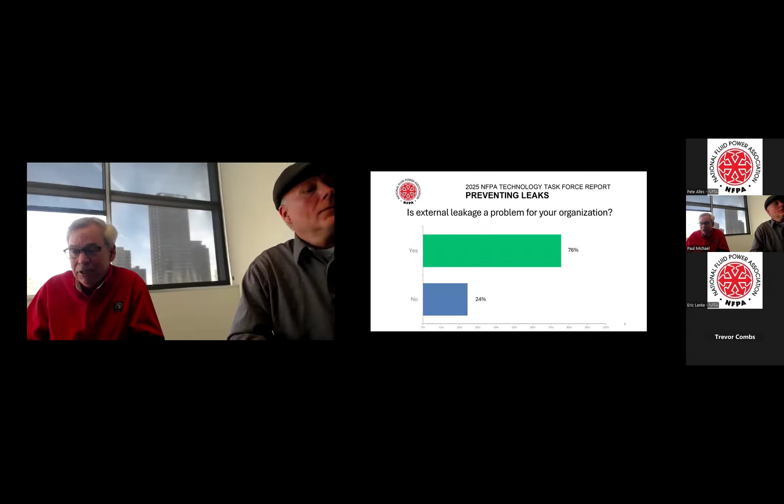So we're getting into the document, the white paper, and this will be posted on the website in a couple of days along with the recording of our presentation. It starts off by talking about application factors—component accessibility, temperatures, compatibility, things like that. I've enjoyed going over these considerations with Andy, and he had something really interesting to say about how fluid contamination causes leakage.

Fluid contamination causes a circle in the system: when you have contamination, you get wear on components, seal wear, leakage, increased temperatures, and then the circle gets bigger and bigger, causing more and more leaks. So by correcting contamination, you stop causing component wear, which stops causing heat, which stops causing other issues—hardening of the seals could be one, or hoses, or expanding and contracting of fittings beyond what they're normally designed to operate at. Good insight.

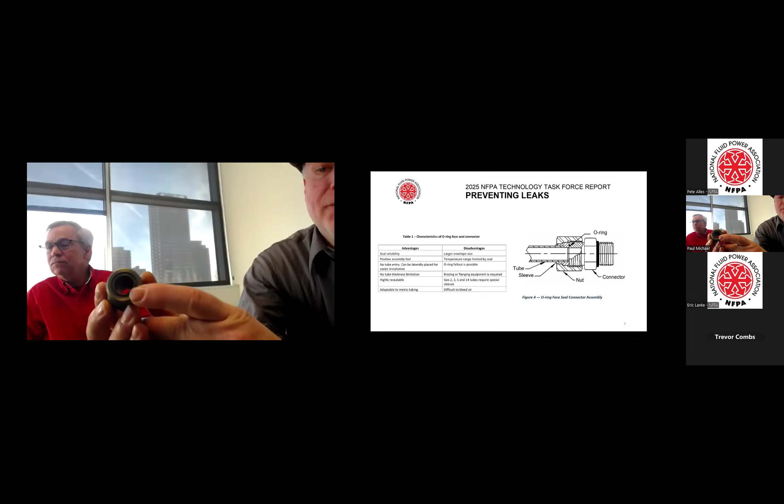So the O-ring face seal actually has a positive seal in the face of the fitting. Therefore, when the face hits, it has a positive seal when you tighten it correctly.

Most of the other fitting types, like the JIC, here is a compression metal to metal seal. Also with the bite type, which has to seal on the ID and the OD.

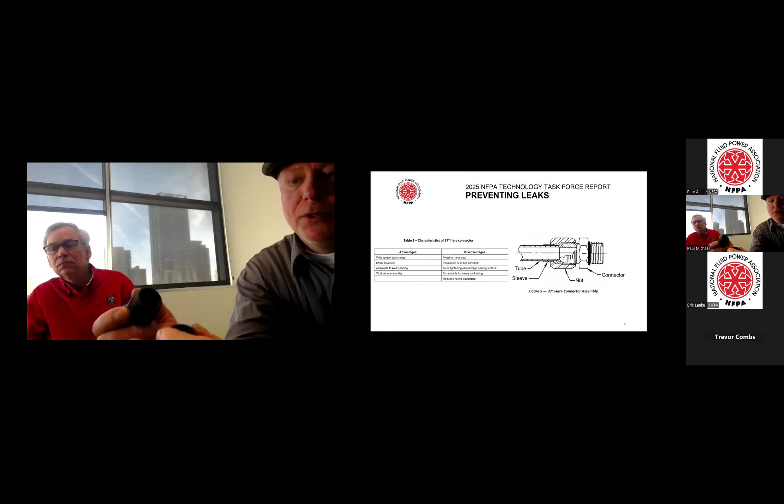All these fittings take a certain amount of skill to put together, which the O-ring seems to be the best for most applications just because it does have a positive sealing surface, which does not have to require a metal-to-metal fit. Because when you deal with a metal-to-metal fit, we did this in our shop and purposely over-tightened this fitting to cause damage to the seat. So even if you replace the hose on this fitting, you're still going to have a damaged seat, which then will cause leakage.

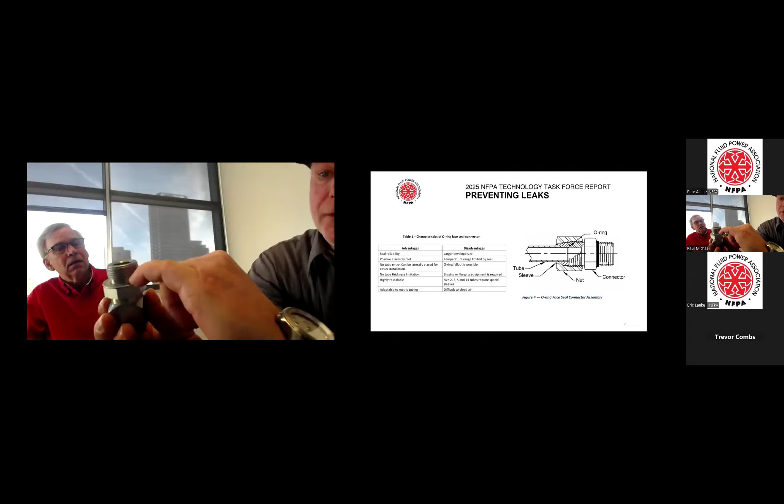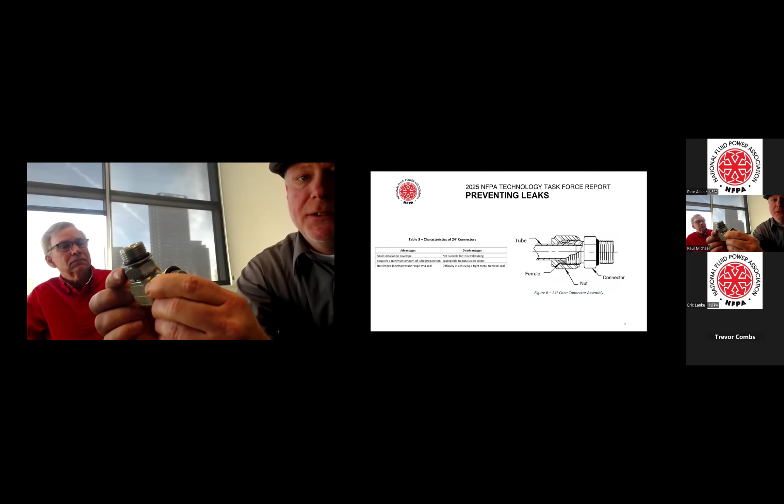So there's various types of other things with the SAE adjustable fittings. This is the O-ring groove where it sits. Numerous times these are installed improperly, and what happens when you install them improperly is you drive that O-ring down into the thread and then you get seepage over time. The correct way to do it is to back up the nut, let the washer come up to there, hand tighten it till you seat the O-ring, and then you have a 360-degree turn before you tighten your jam nut.

That way that O-ring does not jam into that first thread. So a lot of this takes some skill. The O-ring face seal takes the least amount of skill. The others all require some skill set. So it's a positive seal.

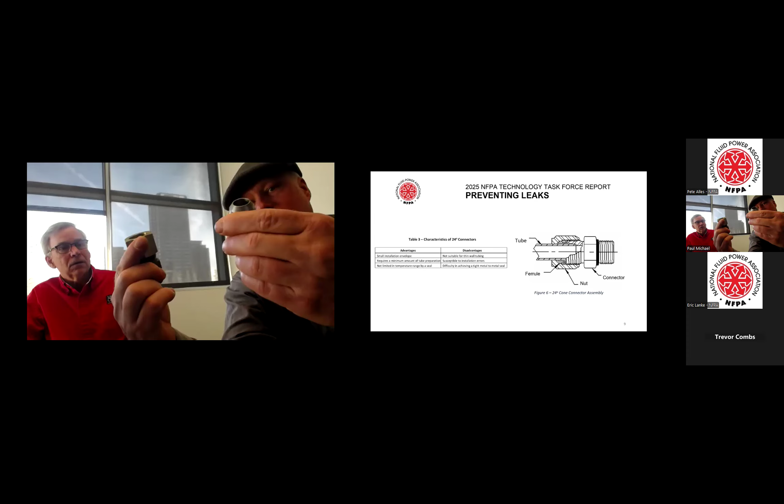So therefore, it's the superior fitting as of right now. The problem with it is you do have a little bulkier of a connection, right? The nuts are bigger, the physical size is bigger - this is a 12 JIC, this is a 12 ORFS. So you physically have size difference. There is a little bit of extra cost to that fitting also across the board, depending on how you look at it, but it does prevent more leaks. The downfall, again, is O-ring material and compatibility, making sure that fits for your application.

Very good. Thank you. We'll look for questions in the chat.

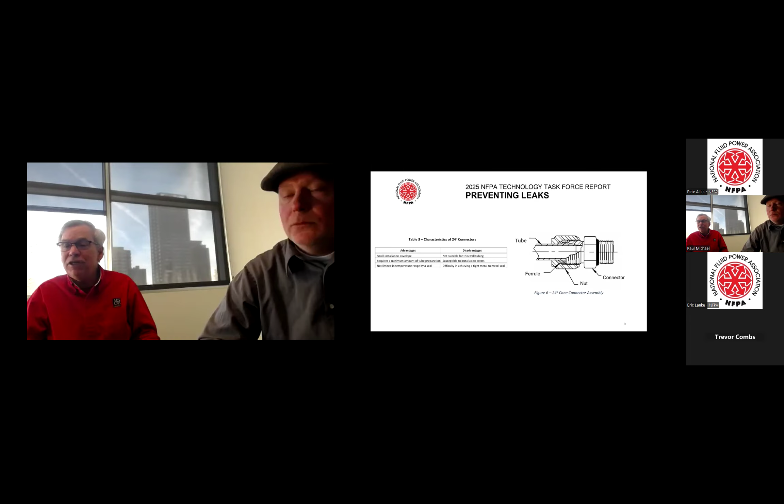So that covers the O-ring face seal and 37 degree. Tell me about the 24 degree one.

The compression fitting is made up of the body and the sleeve, which the tube has to be inserted all the way down to the bottom. They do make a tool to preset this to the tube, but most people, if they're doing a field repair, they'll push the tube all the way down. You have to hold the tube all the way down and then tighten this to get it to crimp to the ID and to the OD into the seat.

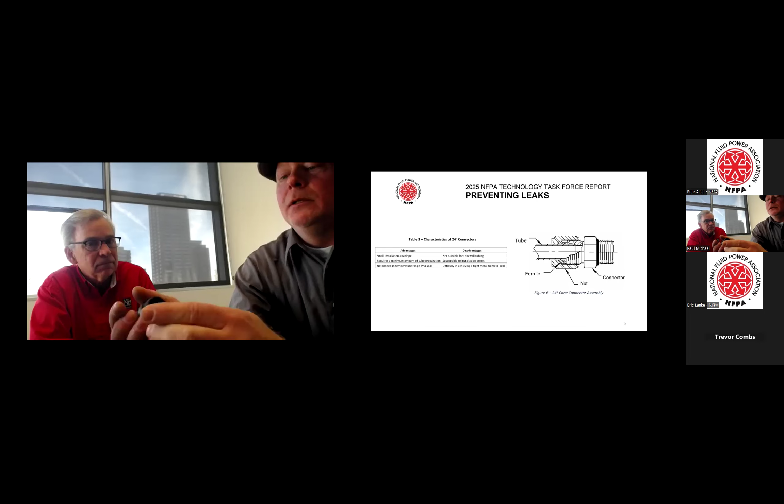The issue with that is you can over tighten that fitting and cause an internal crack on the tube because this is biting into the tube and deforming it. And manufacturers vary on their design of that fitting.

So it's more so that you can't interchange. JIC is JIC - pretty much across the board, they're going to work. Where a bite type, manufacturers make them differently, so they're a little unique to themselves. If you go with one, doesn't mean you can directly take that off and put another one's on.

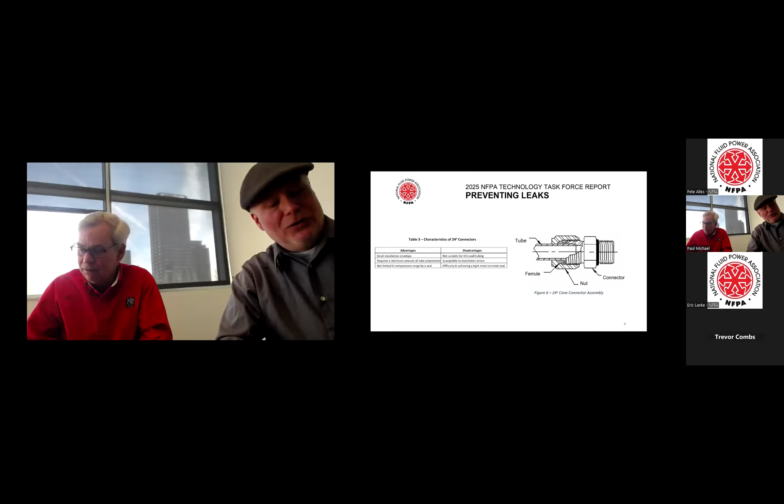37 degree is JIC. Just to make sure you know there's some variance in our industry—O-ring face seal, ORFS. There is some different terminology across the manufacturers that is not unified for identifying all the fittings, so there's some variance in the language. Like this particular fitting takes a Boss O-ring, which I forgot to bring up. So there's some variance, yes, in the industry.

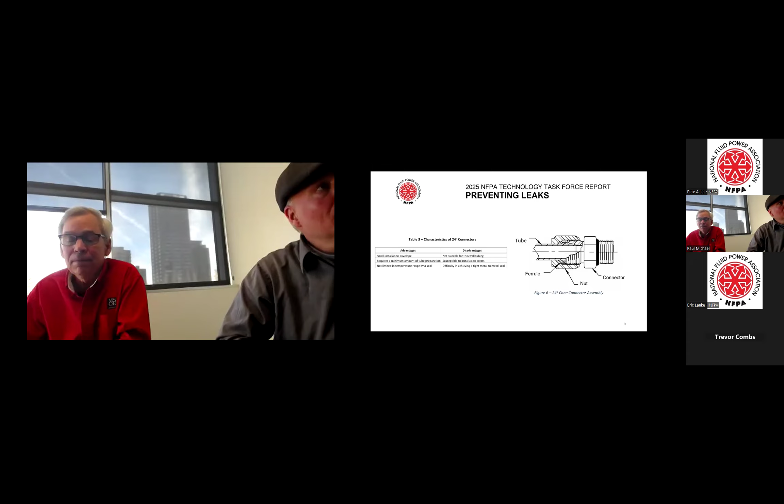What are your opinions on securing style O-ring, with assembly issues like normal O-rings falling out or getting pinched? There are various types of O-rings that have come out. There are particular OEM manufacturers that make their own O-rings for some fittings. I've used quite a bit of them—some work very well. There is a downside in cost, so there's pros and cons. It does work in most cases, but it has to be applied correctly, and if cost is an issue, that's probably not how the average OEM would build it. This is for people worried that during the assembly process with an O-ring face seal, the O-ring's going to fall out.

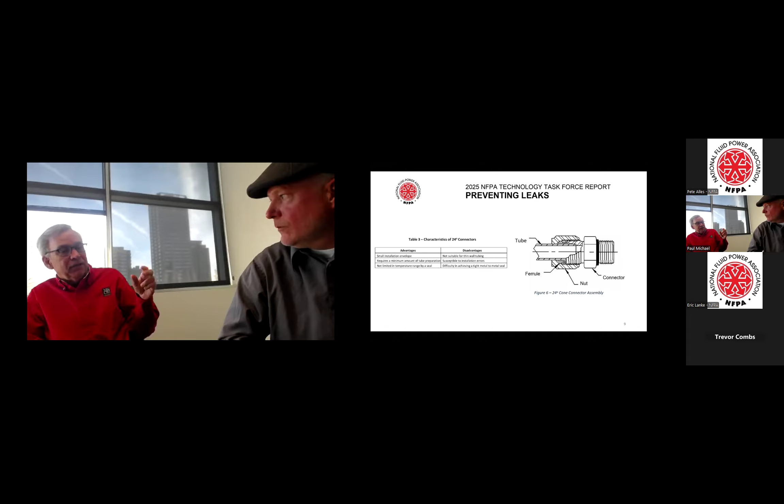There's a lot of different seals you can put on that face, and it would take me a long time to go through all of them. We'll talk about that in a little bit though—there's a lot.

What are your thoughts on the O-ring in the JIC male fitting? It's also noted that JIC stands for Joint Industry Council. Are they talking about the O-ring directly on the face? It doesn't say—so, your thoughts on the O-ring in the JIC male fitting. It's been my experience that they work well.

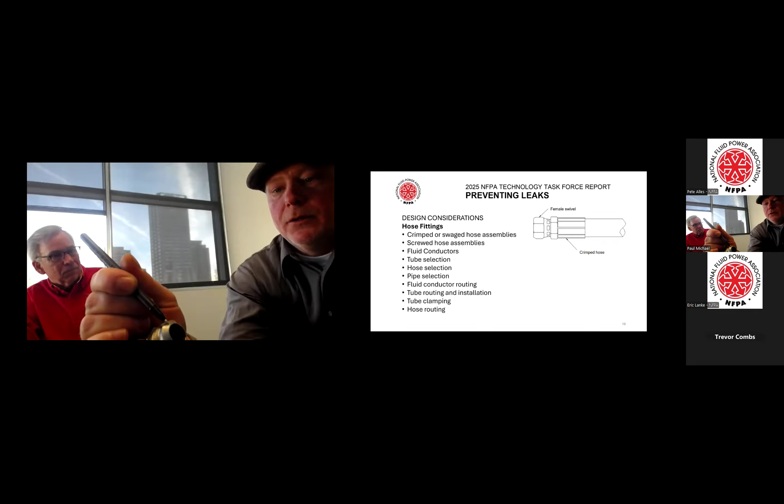The issue is they're more susceptible to collapsing the ID of the actual fitting. Some manufacturers put an O-ring right on the seating surface, and they work well. The issue is a lot of mechanics over-tighten it and start collapsing the ID, which if you maintain the proper torque specifications, they do work and work well. But again, mechanical aptitude versus functionality is sometimes a hard blend to get right.

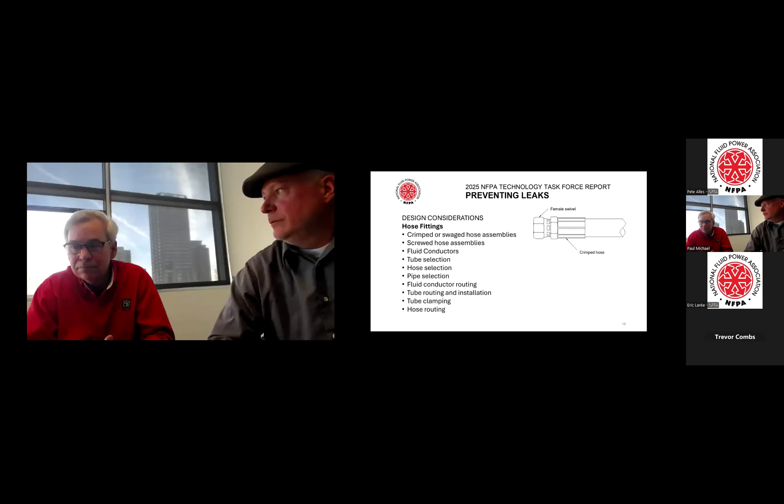Great comment in the chat suggesting you join the ISO TC 131 SC7 Work Group 3, working on a technical report on usage, design, storage, assembly, material, etc. So yes, joint standards—you can contact Ben Brown at NFPA to get involved in the standards development committees.

In the document, we have quite a bit dealing with hose fittings—selection, routing, clamping. We're really excited because Chad Chapman from Gates is going to be presenting on hoses next, so we're looking forward to his presentation on the topic. But there's a lot of that in the white paper as well.

Next, in the white paper, we get into the assembly practices, and one of them is the split flange port. Andy and I were talking about how you do this 4-bolt tightening pattern when you've got a heavy hose with a flange on the end, trying to get it bent into position and stay there while going from one half to the other half.

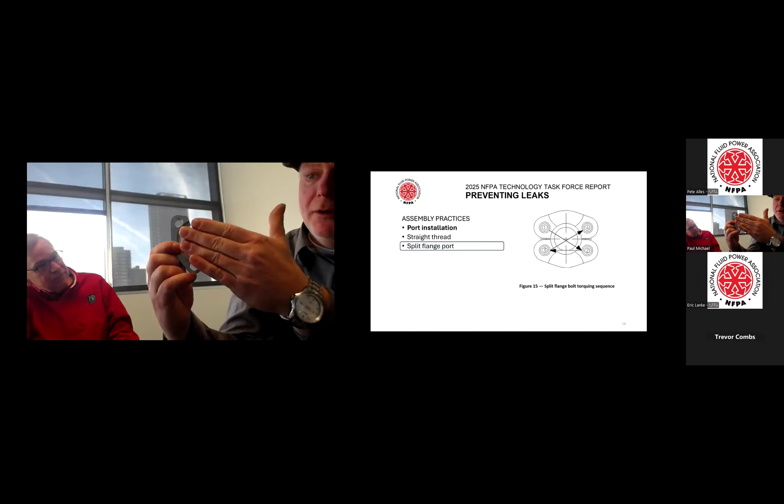Yeah, there's a couple tricks to the trade. One thing is taking a split flange half and making sure you have plenty of room between the face, so when the fitting comes in, it connects upward into the seat and not across the face. That way you don't roll the O-ring out of the face, damaging or pinching it, and then bring it uniformly in to secure it, or hold it in as you snug the bolts and do your bolt pattern.

A lot of mechanics struggle with that O-ring extruding during assembly—I've done it myself, it happens. So when you're sliding that thing into place, if you slide it in, you might wipe the seal out. One thing that helps is leaving the bolts loose and far enough away that you don't make contact with the O-ring until you can push it straight onto the face, then snug the bolts and do the pattern of attaching it that way.

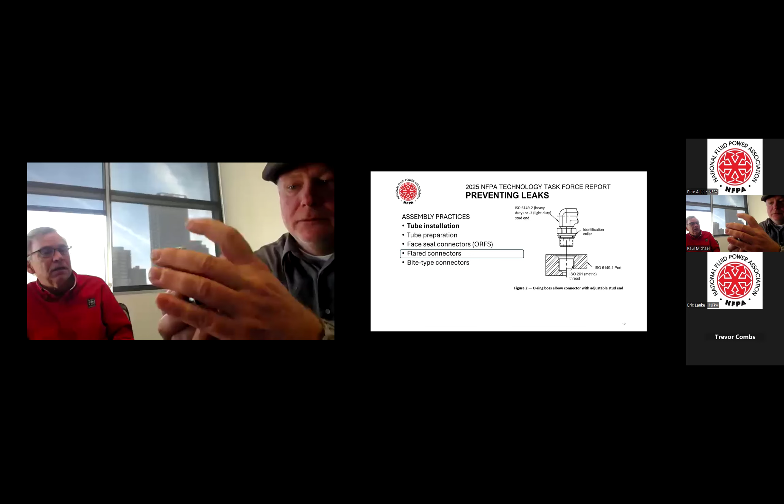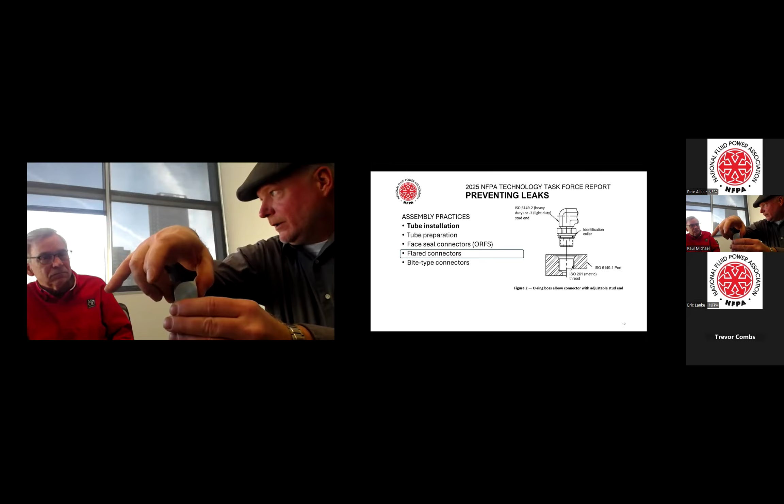You mentioned that the O-ring boss elbow connector adjustable stud end is a source of leaks, and you've made a lot of money fixing these. Can you explain? This is an example where we purposely damaged one by driving the O-ring into the groove wrong - here's one seated properly. Hand tighten this down, then once the O-ring is seated, you can turn it 360 degrees to adjust, then tighten your jam nut to hold the fitting. That way you're not grinding the O-ring, because a lot of people don't use lubrication on their O-rings when they should put a little bit on during assembly, so it goes together without leakage.

That O-ring itself is a Boss O-ring, with a different cross section than an 1/8 or 32nd or a standard O-ring. A lot of people have an O-ring kit and think they can just grab any O-ring, but it's not the appropriate one for that application - the diameter might fit, but the cross section isn't right. The O-rings are round, and the ID and OD are different, so it's not a standard 1/8 inch 32nd cross section. Typically they're a 90 durometer, a bit harder, which makes them better for a static sealing application.

Next, we want to talk a little bit about conductor cleaning. We talked earlier about contamination being a concern.

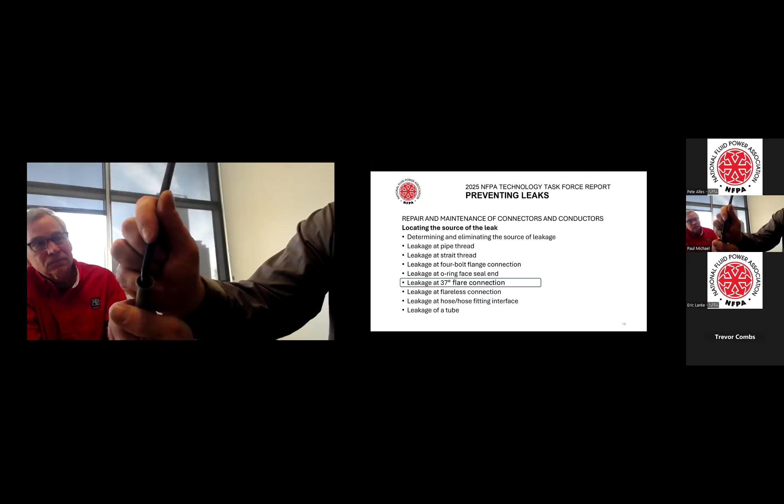It starts with your fitting - here we over-tightened this fitting and damaged the seat, starting to collapse the ID a little bit. Most people will just put on a new hose, but that's not going to solve the problem. So we made some samples of tubing - this one is made correctly, and this one has been over-tightened to the point where you cannot spin the nut anymore, so they start twisting the tube and cause more damage. Most of your tubes, when damaged, will crack right at this point, and it's very, very difficult to see.

Can they see that well enough? It cracks right there, at the bottom of the seat - very difficult to spot that tiny crack. So a cracked flare is a significant problem, and you either have to replace the whole tube, or cut it back and reflare it, depending on how the tube run is done.

That crack usually starts out as a drip, and then somebody goes to tighten it and makes the drip a little worse, so they crank on it even harder. Now they've damaged the fitting, and damaged it even further trying to repair it, because even if you reflare, you're still going to have a damaged fitting. So now you have to replace both the fitting and the tube because the leak wasn't identified correctly. Do you think it's true that if you see a leak or a little drip, you better take action right away, because ultimately it's going to create a huge mess?

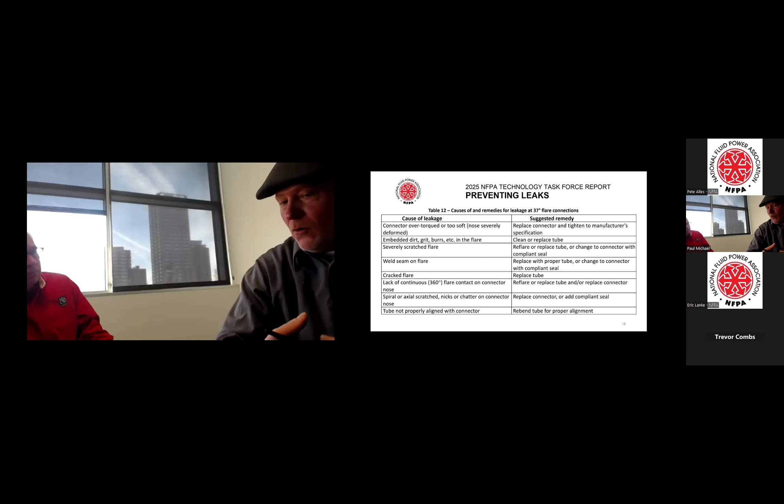The leak in itself tells you something's not happy, something's not right. So that little leak, you leave it go, and then all of a sudden it blows out like a hose or whatever. Hoses are more prone to blowouts - you see a slight bit of leakage, just a drip, and then an hour later the whole hose blows because they're more susceptible.

The braids are already compromised. The fitting or the crimp is already compromised, which we'll get into later. So with a tube and all the other ones, a drip doesn't get better - it's not going to fix itself.

Usually I like to see people investigate why. If it didn't leak before and it's leaking now, why? There's something wrong with the tube. Your clamp broke, now you're putting more stress on your tube, now you cause the end to flare.

Clamping is one of the biggest issues that causes leaks. Why is that? Because it creates vibration and pressure on these compression joints. With that vibration and twisting and moving, the compression joint just keeps digging in tighter, and that causes a crack.

It gets a lot of torque on it and digs in and causes that crack. I've seen people repair leaks and then it comes back two weeks later because they didn't repair the clamp. You have to repair your clamping and do better clamping, period - people don't clamp good enough.

Stop that vibration and things will be much happier and a lot less leaks. Very much happier.

There's a section on the sealing of major components - we've got static sealing and dynamic seals. We've already talked about the special O-rings for the face seals.

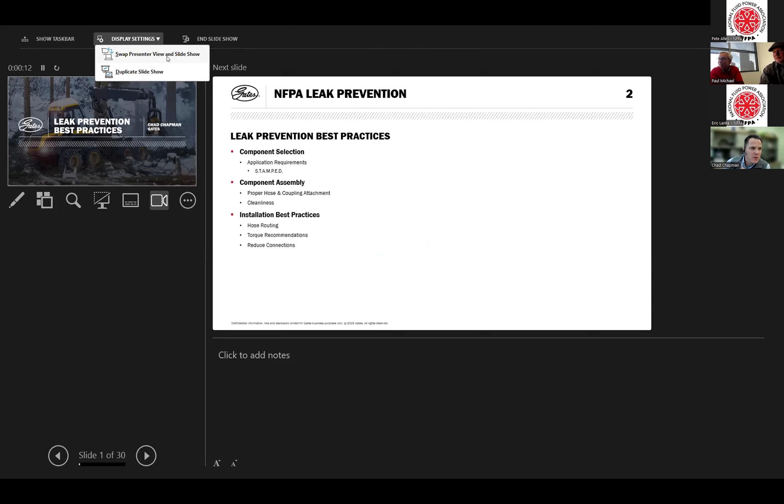All right. Can you hear me? Yes, sir. All right, let me try this over. Switch screens. Thought I had this all figured out earlier, so apologies for that.

Paul, thanks for the great introduction. Again, I work for Gates. I'm an application engineering manager, so part of my job is recommending products, which I'll get into here.

Thank you for inviting me to talk about leak prevention. What I like to do is talk about it from best practices as a hose and fitting manufacturer, looking on the hose side. We had a lot of discussion on the coupling and connection. Now we can get into a little bit more on what it means with the actual hose assembly piece when it gets put on equipment.

So when I thought about leak prevention, I came up with 3 categories that I wanted to bring up and discuss as part of some best practices. First is the component selection. We have an acronym called STAMPED that we use to make sure that we're selecting the right components to meet those application requirements or customer needs.

The next piece is putting that coupling onto the hose. That's a very critical process, which can lead to issues down the road. It could cause leaks or blow-offs, etc. So I'll talk a little bit about that stuff.

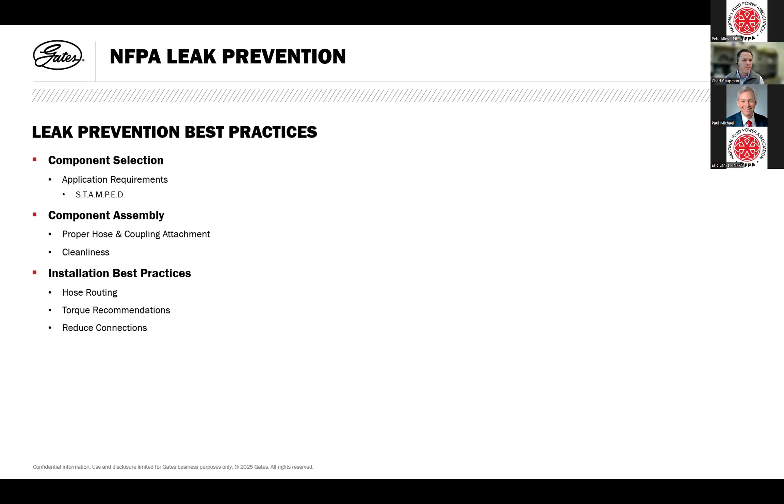All right, component selection. So we have a term called STAMPED. It's a 7-letter acronym. This by far has been the greatest tool that I've used at Gates on the fluid power side. And this really helps define what those application requirements are to make sure that we can select the right components to make sure we meet those application needs or customer needs.

So the first letter S, that's size. That's pretty straightforward. That's the ID of the hose or the threaded end size, the termination size. What size threaded end do you have on the fitting?

And then temperature, T for temperature. So it's not only what the internal fluid temp is that's going through the hose, but you also got to be aware of maybe any external heat sources that you may get where it impacts the outside of the hose, which could also cause some premature failures.

And then A is for application. What type of application is this hose or hose assembly being put into? Is it a static application? Is it a high impulse? Is there a lot of vibration? Application, what is the hose supposed to do? That's an important ask when we're trying to find the right hose or fitting components.

M is material or media being conveyed through the hose, or material compatibility, however you want to look at it. Basically, is that hose compatible with the fluid that's running through it? That's what the M stands for, and that's one of the most critical pieces. Hydraulic systems tend to be pretty straightforward with the type of materials, but you also got to worry about the cover. If the cover of the hose is being exposed to a chemical or other fluids, you don't want that chemical or that cover to be degraded over time, and it could be a material compatibility issue on the cover if there's some sort of external excess fluid there on the outside.

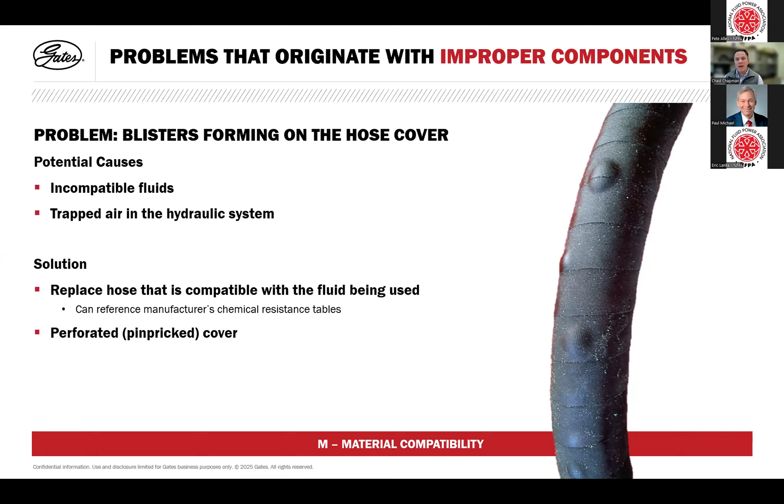Obviously solutions for that would be choosing a hose that is compatible with the fluid being used. There's chemical resistance tables out there that we refer to all the time. Typically each hose manufacturer will have a compatibility chart that you can reference. And then for the trapped air, pin pricking the cover is also an option to allow that air or gas to escape out of the cover so it doesn't bubble up.

Here's a picture of two hose examples where the cover is hardening and cracking on the outside. Possible cause: excessive heat. Internally, maybe it's too hot, or externally, it's next to an extreme heat source like an exhaust. Also ozone or weathering too, that can impact if the hose is outside being subject to the elements. Solutions to that would be using a higher rated temp product, using heat guard or heat sleeving, or rerouting away from a heat source if there is an external heat source causing the cracks.

Lastly, it is a recommended practice not to intermix coupling and hose manufacturers. Here's an example where you have a Gates fitting on a competitive hose. Every manufacturer designs the hose and fitting to work with each other, and we have things called crimp specs that we make sure we test. We test the SAE, and we make sure that specific fitting and hose that we recommend will meet those performance requirements of SAE. We can't guarantee using a competitive product that you'll get the same performance.

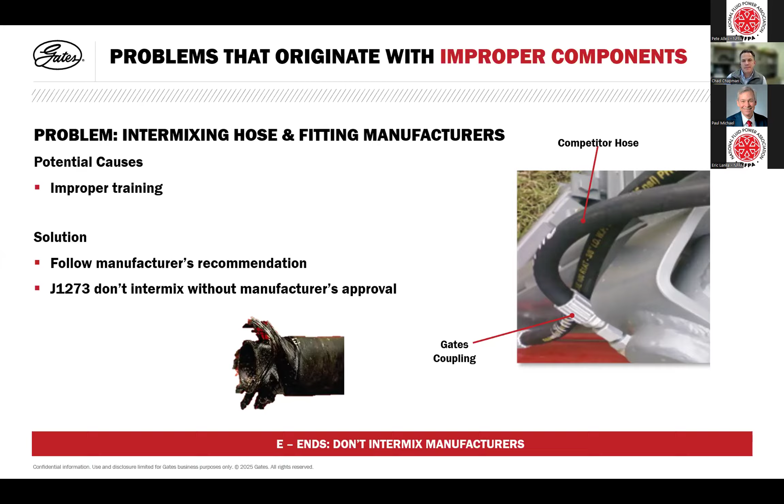That crimping process, and what to crimp that ferrule down to, is typically spelled out by the hose manufacturer in what they publish, called crimp specs. Each manufacturer will have different tools - we have online tools, crimp charts, etc. But it tells you for this size, this hose, this fitting, and this machine, I need to use these dies to crimp it down and hit this crimp outside diameter.

So when it comes to actual crimping, there are three critical pieces to having a good crimp. One is the insertion. You want to make sure that the fitting is fully inserted into the hose, that there's no gap, because that could lead to a coupling blow off. You can mark the depth, like the picture shows, and when you put it on, make sure that mark kisses up or is hidden by the ferrule.

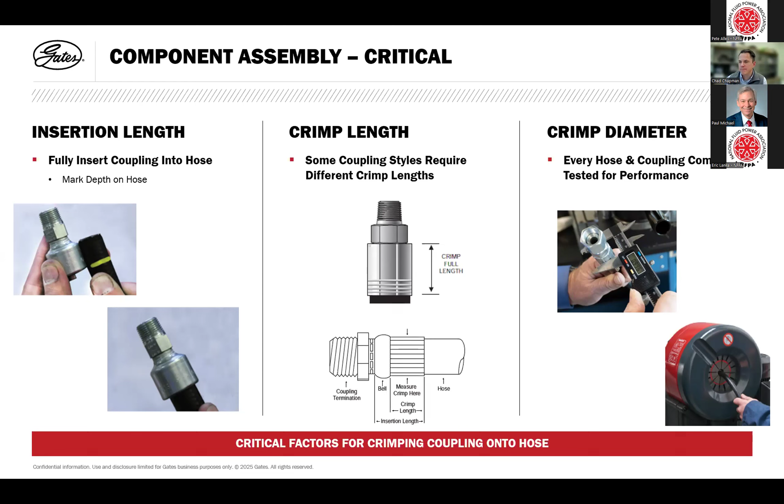All right, the image on the right is under crimped, so I didn't crimp it down all the way. It's loose. Again, if it's loose, it's not biting in enough, and it's likely susceptible to a coupling blow off or a blow completely off at a higher pressure, or leaks too — since it's not sealed or crimped down tight enough, you'll get some leaks. And here's an image of a correct full crimp, what that looks like.

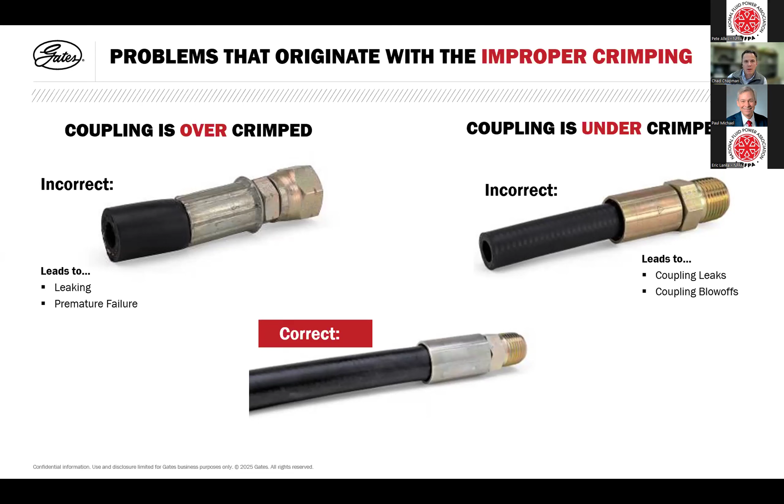So the other piece, we talked about crimping, but when you're building an assembly, you've got to cut the hose, and that generates some debris from the rubber and the steel in the hose. We talk about hose cleanliness - we don't want to introduce any foreign contamination to the hydraulic system. We don't want to add any debris into there. We want to make sure that hose gets cleaned out.

If you don't clean it out, that can lead to component wear in the system. You have debris or chunks of rubber or metal being run through the hydraulic system that can reduce your efficiency, create blockage, or even early system failure.

So cleaning, you want to make sure that's another step in the assembly fabrication process. There's a couple of different methods. Some folks out there use shop air, foam projectiles, or fluid flushing.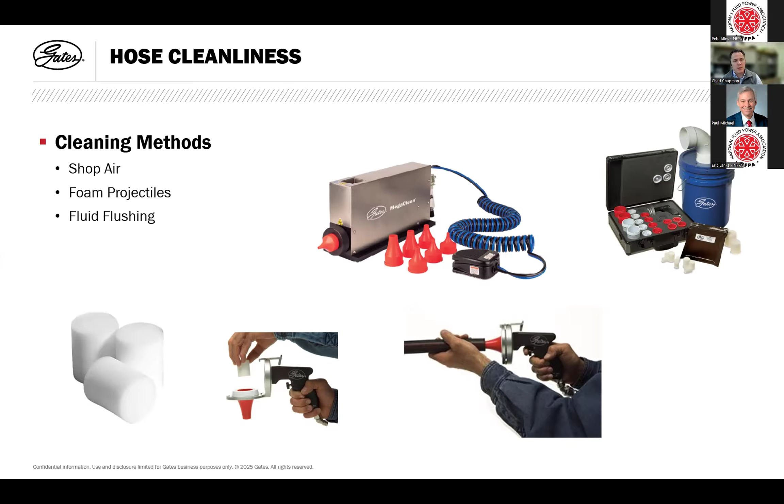A lot of times too, you can crimp it and then do that same process again after it's crimped. It just depends on what that OE cleanliness requirement is - there's different ways to achieve the different cleanliness levels out there.

Hey Chad, we've got a question here. Yeah, maybe it's a good time for it. The question is, aren't hose and fittings following certain standards in terms of dimensions for interchange between different manufacturers?

Yes, typically SAE is the predominant one, SAE, ISO. There are ID tolerances. Just because of that though, that doesn't mean they're interchangeable, right? That's not the point - it doesn't mean they don't fit together. It just means that as a hose manufacturer, when we release a hose to the public, we design that hose and fitting that we make to work together, and we run it through rigorous tests.

Impulse, burst, you name it - we run the gamut of tests on that specific coupling and fitting. So if you go and take a competitor's coupling, yeah, that competitive coupling may fit on our hose, but what's the crimp spec? What's the crimp diameter? What if they change the coupling design? We don't control any of that. So that's generally why you don't want to intermix between fitting and hose manufacturing.

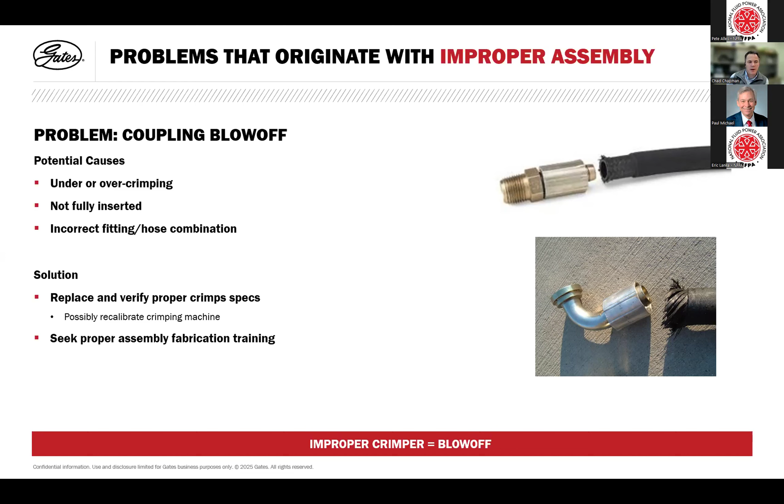All right, now we'll get into the last section, which is installation best practices. So we've got our finished assembly, now we're putting it into the application, and we're going to look at hose routings, eliminating unnecessary connections, and torque specs. Some mobile equipment applications or machines have a lot of hose in it, because sometimes we used to joke that hose is usually an afterthought - it's the last thing that gets thought about.

So obviously there's different techniques and routing guides that you can utilize, and a lot of the manufacturers publish information on best practices - we do. There's also best practice info in J1273. Typically too, when you start introducing a lot of threaded connections or stacking adapters, that's just adding more leak points to the system, so you want to try to keep that to a minimum.

And then torque specs - Andy talked about cracking the seat on that flared tube for that JIC. Again, you want to make sure you're following the right torque specs, which is called out in J2593. We refer to following the SAE torque recommendations when it comes to the different SAE thread configurations.

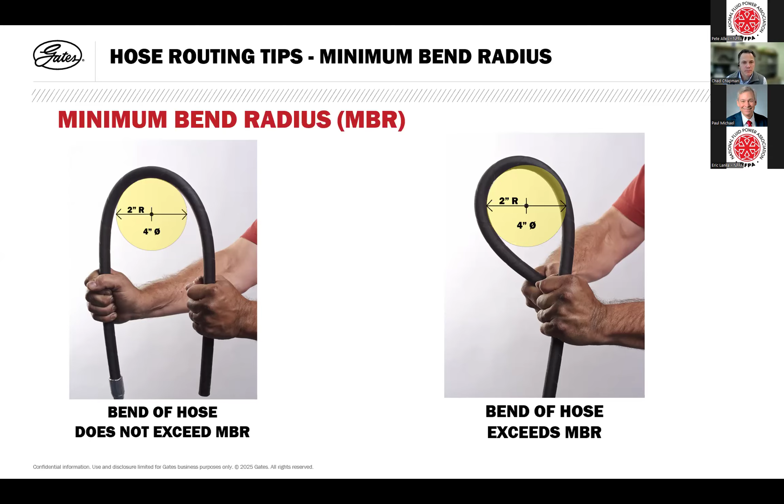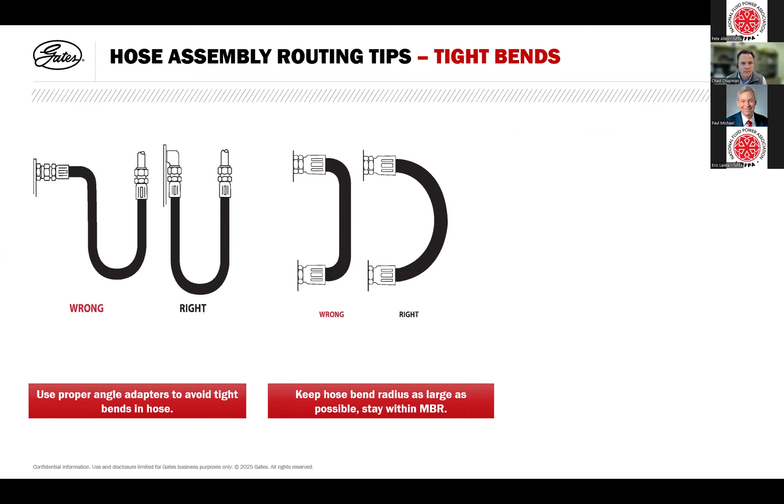Same thing here, you've got another tight bend. You want to try to extend and use a larger bend radius where you can, without using too much excessive hose. Another picture shows a tight bend right off the bottom left fitting on the wrong side, where it comes off with a little bit of straight length but then has a sharp bend. Again, you're putting a lot of stress in one area, which can lead to an eventual potential leak point or weak point in that assembly. You can clean things up using elbow adapters or fittings.

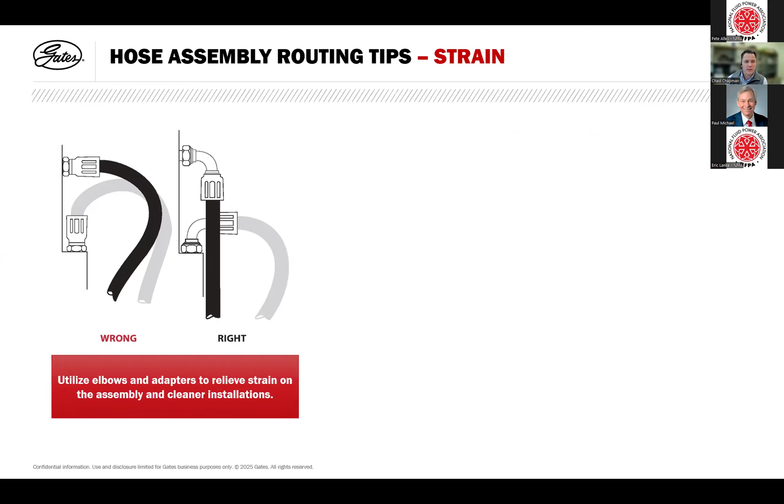This picture shows strain being put on a hose assembly - the grayed images are probably a better depiction showing there's a lot of strain. You typically want to leave some straight length behind that ferrule before you start bending. You don't want an immediate bend right past the ferrule, because that can cause a weak point there and eventually fatigue and stress that area, leading to potential rupture or leak. Here's an example of one that had a lot of flexing behind the fitting. Again, in the bottom diagram, you want to try to have some minimum straight length before you start your bend if possible, because otherwise it leaves a potential weak point in the system.

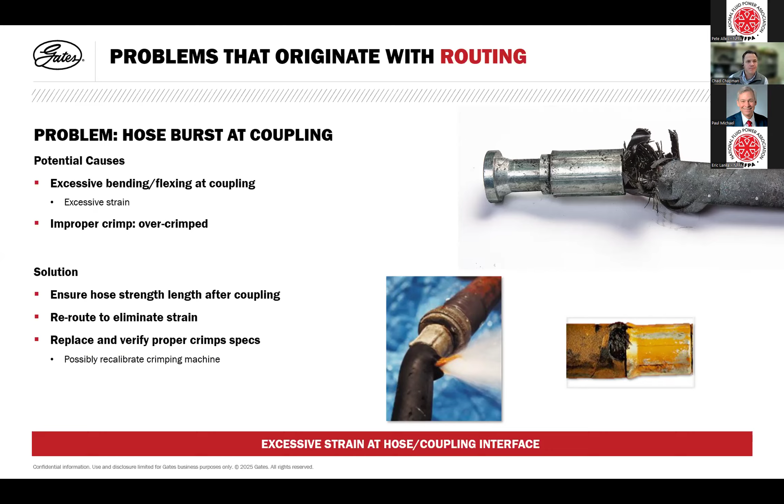So again, this is an example of one that had a lot of strain. Sometimes if you have a lot of weight - some of these flange assemblies are large, 6,000 PSI spiral wire, 2-inch, very heavy - and the flange ends are heavy, you need to make sure you don't have a lot of side load or load on that fitting, because that could lead to issues.

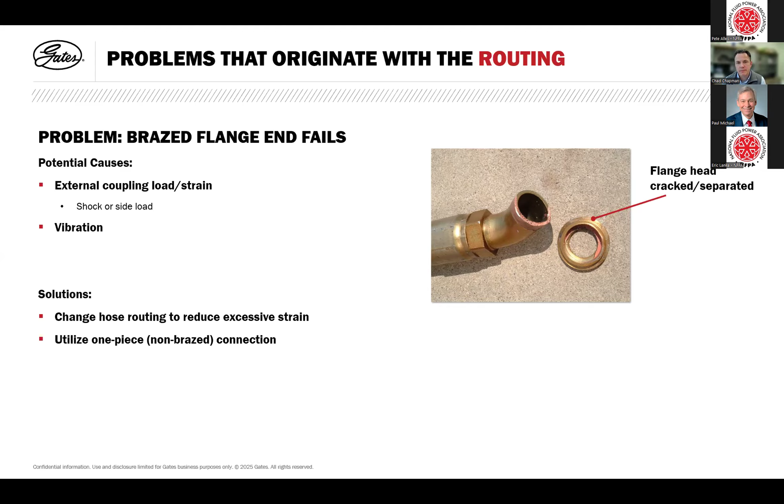Hey Chad, I think you actually kind of hit on something that answers a question in the chat. There's two of them actually. Are there hose clamping guidelines to prevent fatigue failure and hose crimping? And are there special hose clamp guidelines or suggestions depending on the type of hose and use case?

We do have, as Gates, some clamping options, and we have some crimp specs for a certain hose and clamp style that you're using. The clamps, like the P clamps that go around, are typically used a lot of times driven by the OE from the hardware they have when doing the install of the equipment. We do have some, and some manufacturers have it. It's probably an area that could be improved on more, just in general, as far as best practices. But there are some guidelines out there for clamping, though they can be hard to find.

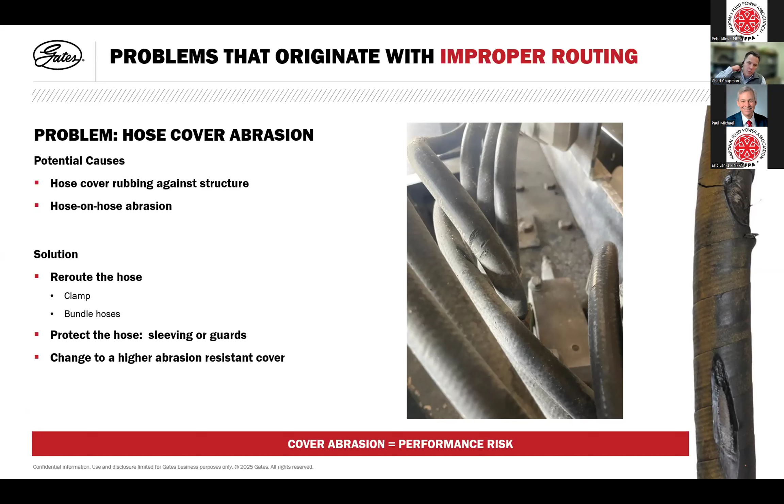Hose twist, I won't spend a whole lot of time on this, but you can see it because every hose will have what we call a lay line, or a label across the hose. If you see it spiraling like that, that's bad, because typically some manufacturing processes do have a spiral lay line, especially more on the industrial hose side. But in general, if it's supposed to be a straight line and you see that it's spiraled because there is hose twist, that's really bad for a hose. I know at one point we were saying just as little as 7 degrees twist can significantly reduce, almost by 90%, the service life of the hose. So twisting is really bad. The hose isn't designed to be twisted.

The picture on the right shows just twisting happening from motion, where that back right piece is going up and down. A way to avoid that is looping up vertically, up and over, so you can eliminate that hose twist. Sometimes when you're tightening down these assemblies and not using the backup hex, and you're torquing that nut down on the coupling, you might get a little twist from that too.

So you always want to try to use the backup hex when you're installing the assembly.

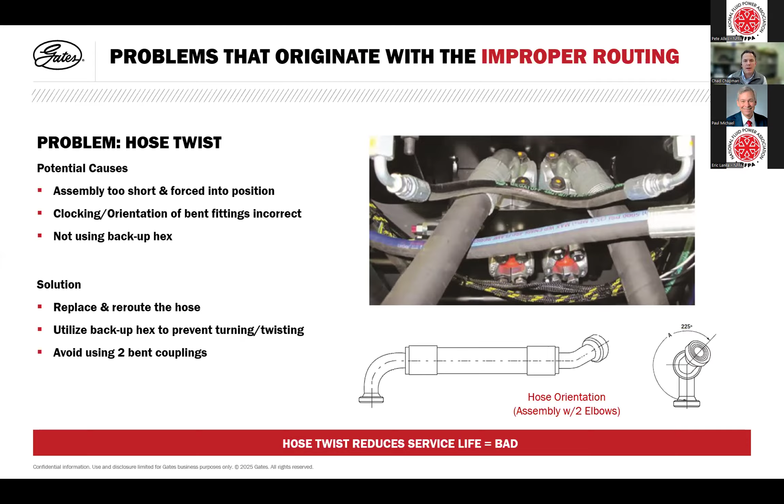All right, coupling installation tips. We recommend again following the torque specs. When you have a fitting, make sure the seat's not damaged, the O-ring's not damaged, and the placement's right with the O-ring. Otherwise you don't want that O-ring to roll or get in the way or become misaligned where it now creates a potential leak point there.

Lastly, this is one of my favorite pictures. This is like low-hanging fruit when you walk up and see a piece of machine like this. You have lots of adapters stacked on adapters. Looks like there's a check valve there. Over time, people just hodgepodge things together, and that just becomes what it is. But anytime you add these adapters stacked on adapters, you're adding an additional leak point to the system that you don't necessarily need. You can resolve this through cleaning up the adapter usage, maybe using a manifold that you can plug into with all of these hose connections versus all these T's and 90-degree fittings. Because the other thing is, it adds cost, yes, but it also creates a flow restriction, so now you're just adding to your overall pressure drop in the system. You want to try to avoid that as best as possible.

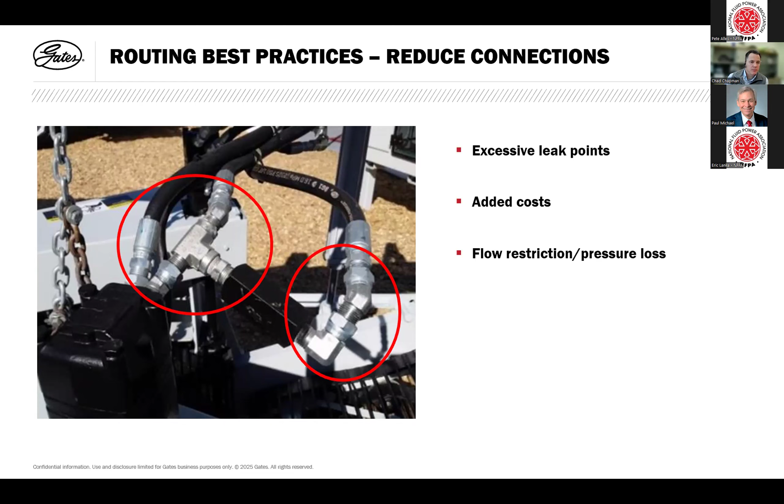All right, I'll open it up if there's any more questions. Good questions along the way, hopefully I answered those to your satisfaction while we went through.

Yeah Chad, I don't see any questions right now. I do see Paul Michael put a comment here referring back to the clamping - Table 7 of the leak prevention paper provides guidelines for tube clamp spacing, and Figure 12 provides a graphic illustration of proper tube clamp locations.

Awesome, thanks Paul. I have a question, kind of a basic question, but something I was just thinking about - what would happen if somebody used a hydraulic tube in a pneumatic application?

A pneumatic application - would you get bubbles on the, like you saw in the picture? Not necessarily, no.

I would, out of caution, just maybe recommend perforation. When I think of pneumatic, I think more of some of the industrial hose products we offer, where we actually have the covers already pricked from us as the manufacturer - that would be more of an ideal solution. But the other thing too, not to get in the weeds, but the hose is designed really to be a hydraulic hose with hydraulic fluid in there. So that material we use on the inside of that hose isn't necessarily designed to work with air - we don't test it. So what could happen is if the air gets hot enough, you could age the inside of that tube. Again, not to get in the weeds, but like a nitrile material versus an EPDM - nitrile is going to have a lower heat performance than an EPDM polymer. And you got to watch your temperature, I guess. So it's not just will the air permeate through the hose, but also what is the air going to do to that material on the inside - is it going to kind of cook and age the inside quicker than it would when there's hydraulic fluid going through there?

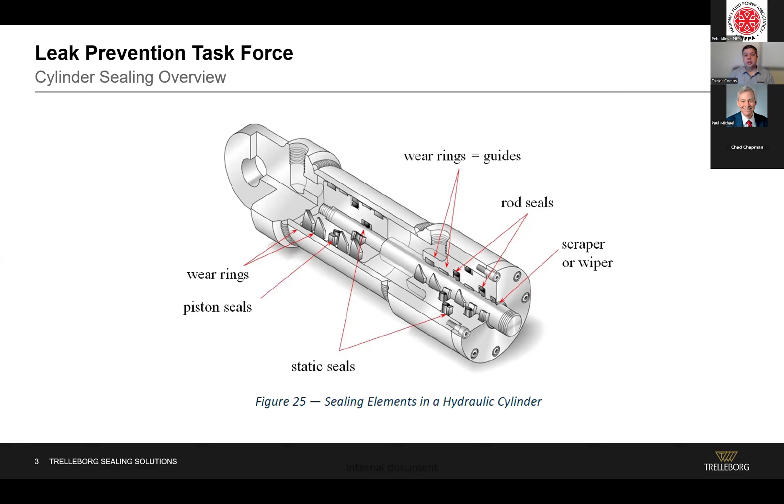The paper does touch a little bit on static seals within the cylinders because they can be a source of external leakage. I wanted to show one of the figures from the white paper, which shows a few different static seals. A lot of O-rings are used as static seals, but there are other options, and some of these solutions can really be problem solvers for static seal leakage, especially on a hydraulic cylinder. I know Andy mentioned the dual seal, for example, which is typically a polyurethane material with 2 sealing edges that can replace an O-ring and a backup ring. We've seen a lot of success in eliminating leakage with an alternative static seal like the dual seal.

But today we're going to focus on the dynamic seals - the rod seals, the rod wiper, and the rod wear ring, which we're not going to talk too much about today, focusing instead on the seals.

When you talk about dynamic sealing, there's a lot of factors that go into influencing dynamic sealing, and specifically reciprocating sealing. There's a German organization of industrial and research people called the VDMA, and they did a paper a while back talking about all the different factors that influence sealing. You can see there's a lot of them there. It's a very complicated system.

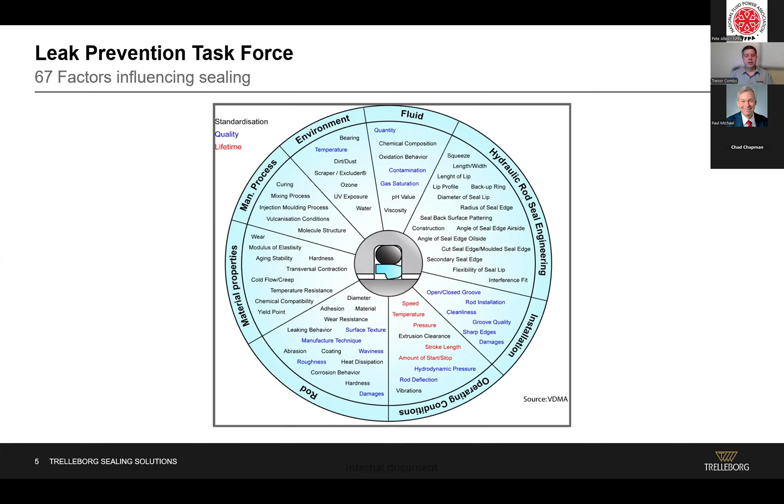But we're not going to talk about all of these. We're just going to focus on three primary interacting elements when it comes to preventing leakage in a hydraulic cylinder and reciprocating seals. So we're going to look at the counter surface, the fluids, and the seals. These are the big three. Then hopefully we'll bring it all together and talk about how they interact with each other and how that helps us prevent leakage in a system.

When we talk about counter surfaces, we often think of just the surface finish, but it really goes beyond that. There are three key factors when it comes to the counter surface itself. We're looking at the base material or substrate—what that material is, what the hardness of it is, corrosion resistance, etc. But we're also looking at the coatings—coating is an important part of that counter surface system. And then, of course, we're also looking at the finishing, which has a lot to do with the process, but ultimately the resulting surface finish. So we'll talk about surface finish a bit.

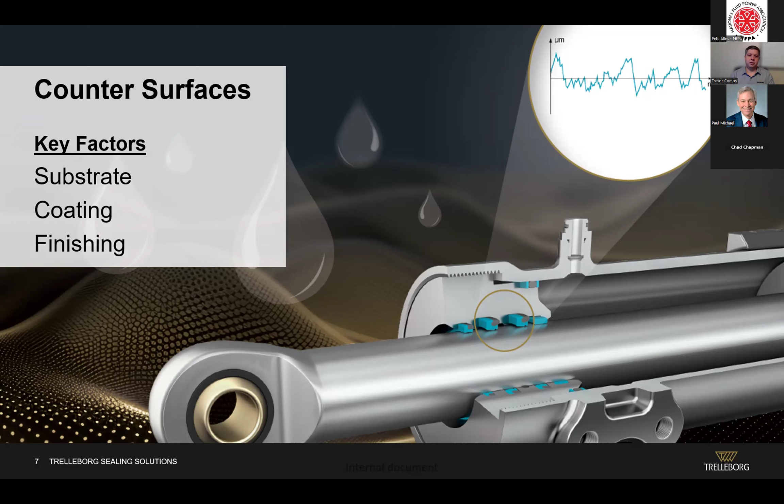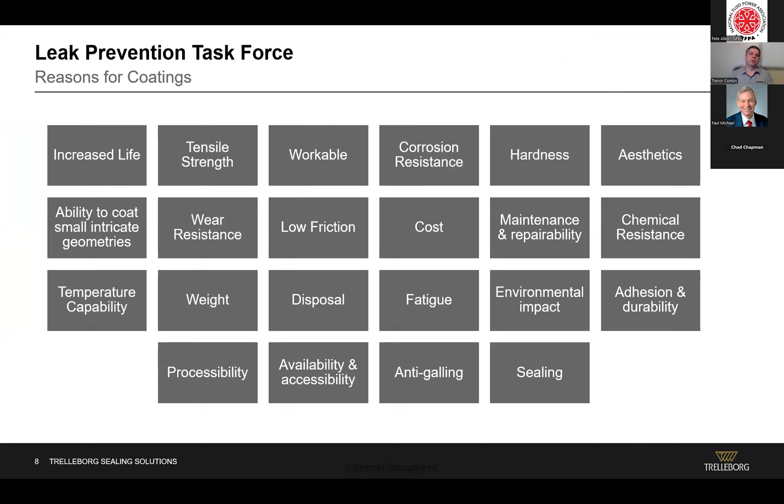When you look at coatings, there are a lot of different reasons to use a coating, and a lot of different reasons for which coating you'd want to look at. This shows just some of the different reasons for using a coating. I'm not going to go through all of these, but just to give you an idea that there's a lot of different reasons why you'd want to use a coating, and it would depend on what you're valuing in your system to determine which coating to use. You can see at the bottom right, sealing is an important aspect for which coating you'd select, so we want to keep that in mind—the sealing and the impact on the sealing system.

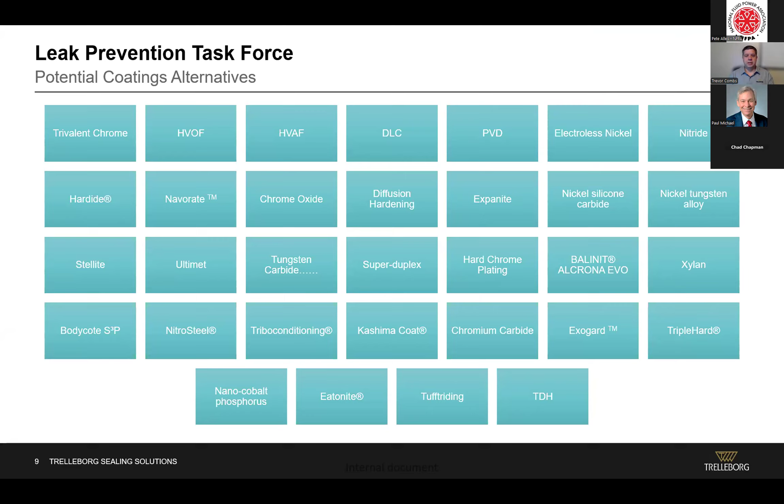When you look at all the different types of coatings, you're trying to match up which coating you want to use that meets your requirements in terms of the reasons for using a coating. I'm not an expert on all the different types of coatings, but there's a lot of different ones there. I'm going to narrow in and talk briefly about hard chrome plating, which is, I think, the most common plating for hydraulic cylinders. It's based on hexavalent chromium, which is a substance of very high concern based on the REACH regulation, but people still continue to use it because it's so incredibly effective for corrosion resistance, for the hardness it provides for the seals they need, and for the cost effectiveness of that coating.

When you look at the substrate and the coating, it's a combination of how they go together. If the coating is supported by too soft a substrate, it can crack, get deformed, or even be carved into—the coating can get carved out under high pressure load. So what we want is a substrate that's hard enough to support that coating, and a coating that's thick enough to support the seal. It's a combination of those two working together.

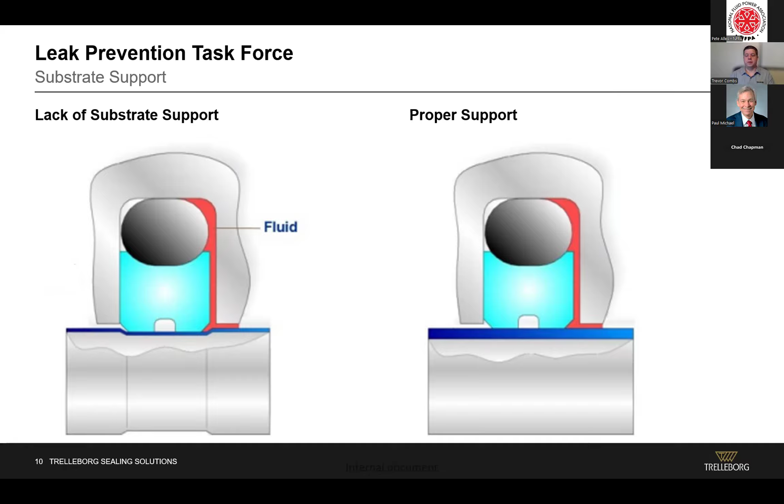Often you'll need to harden, maybe do an induction hardening process on the substrate, to make sure it has the necessary hardness to support the coating. And that coating, if it has the right thickness, will ensure a good dynamic running surface for the seal that doesn't get damaged over time. The coating is typically microns thick, so this picture isn't to scale, but it's representative of wanting to ensure you have the right coating and substrate for your system.

And then the last element of the counter surfaces is the surface finish itself. The functional reliability and service life of a sealing system really depends on the surface finish of the mating surface that's going to be sealed. It's important that it meets the requirements of the seal so you prevent leakage.

Surface finish is quite an extensive subject, but there are three main elements: lay, which is the direction of the dominant surface pattern, like parallel grooves on the counter surface; waviness, which is typically made from undulations from machine vibrations or deflections, kind of the larger surface finish; and roughness, which is the really tiny, sharp irregularities from tool marks from the machine process itself.

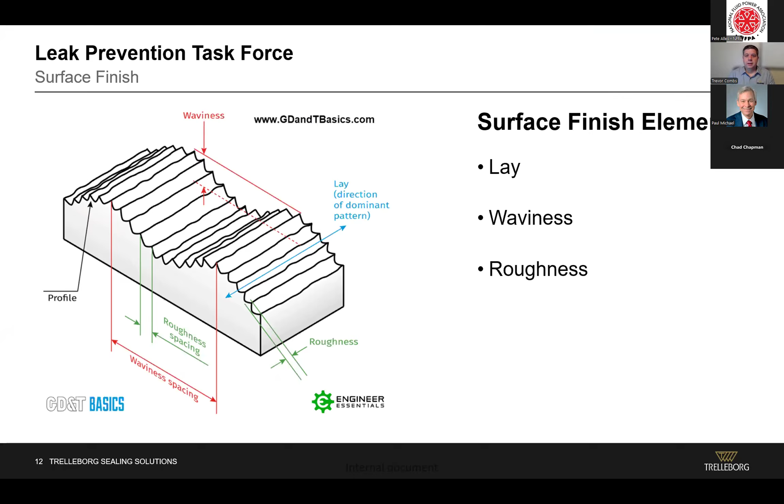So those are typically the characteristics we're looking at when we talk about surface finish. We're usually talking about the roughness and how it can affect friction, wear, and sealing performance in the system. So we're going to talk a little bit about surface roughness.

A lot of people are familiar with RA. It's probably the most common parameter used to define the surface roughness of a surface. It's pretty simple: it's the average variation from a mean line, either peaks or valleys, the average of those variations from the mean line.

What you can see here is that you can have the same RA, but very different profiles, especially as it relates to seals. A seal is going to be affected dramatically by the different profiles on the right, even though they all have the same RA. So what that says to me is that RA alone isn't enough to define the necessary surface finish for a rod.

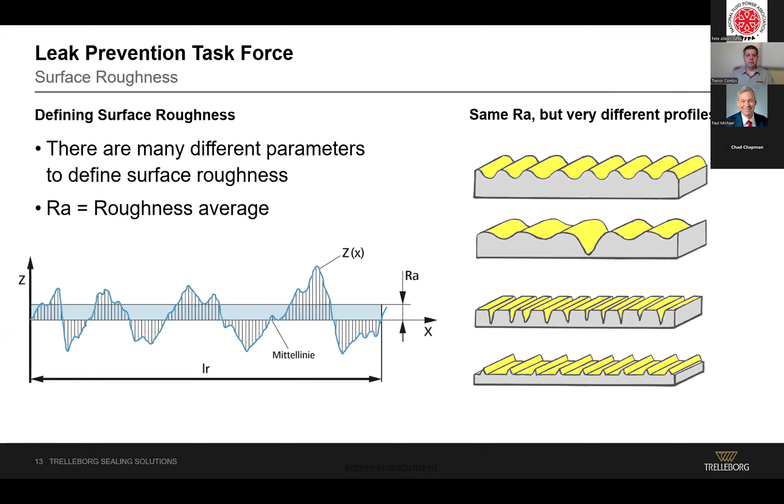So what we like to do is recommend a few other parameters when looking at surface roughness. The R max is one - it's the distance from the highest peak to the deepest valley on a surface finish. It gives you a worst case scenario, what you're up against if there's some major defect on the surface.

The RZ is an average of 5 Rmax values from 5 sampling lengths. You look at 5 sampling lengths, take the worst case scenario from each of the 5, and then average them out. That gives you a better view of the extreme irregularities on the surface, not just the worst case scenario, but a better overall picture.

And then RA, which we already talked about, is the roughness average. That's an important part of the roughness profile and gives you a good quick indication of the overall smoothness of the surface. We have recommendations for each parameter based on the seal material you're using. With a PTFE material, you're going to want a smoother surface than with polyurethane or rubber, because PTFE is more sensitive to that.

Another important parameter is the relative material ratio. The relative material ratio is basically a percentage of the material at a specific depth on the surface. So you're looking to do a cross-section of the surface at a level that the seal is most likely going to ride on for most of its life.

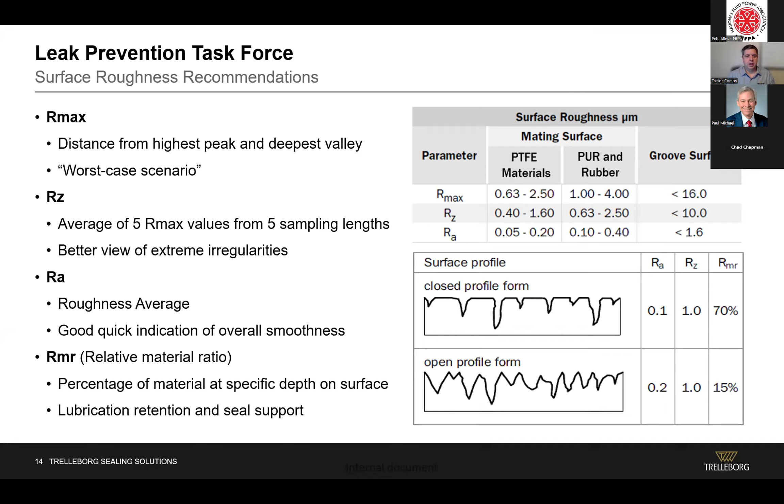The picture on the very bottom right is an open form, as we would call it, and that has an RMR of 15%, which is not ideal for the seal and is going to wear the seal much quicker than a closed profile form.

Okay, so that's talking about counter surfaces. The next element that we wanted to touch on is the hydraulic fluid.

Hydraulic fluid is a crucial element in preventing leakage as well. That's obviously the component you want to keep in the system, but it also serves a lot of different functions: heat transfer, contamination control, and its primary purpose is to transmit energy through the system, transmit that work. It also lubricates the system and helps with sealing by filling the gaps, which is why it's harder to seal a gas or a thinner fluid. It also lubricates the seals and provides pressure for the seals, since a lot of seals utilize pressure to energize themselves and give them the function they need.

So the hydraulic fluid is an important part of preventing leakage.

A few things to look at with hydraulic fluids in a hydraulic cylinder is fluid compatibility. You want to make sure the seal materials and the hydraulic fluids are compatible. If they're not, you can see swelling or shrinkage. With a lot of fluids now, there are many ingredients and additives, and you're not always sure how they're going to interact with the seal materials. So it's important to have some testing or baseline understanding of how that material will perform with the fluid you're using.

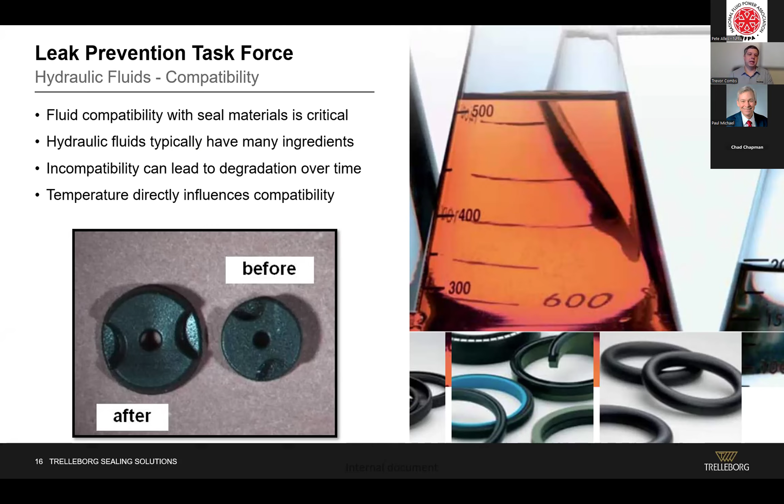The temperature directly influences compatibility. A material that might be compatible at one temperature may not be compatible as that temperature increases. So it's important to look out for that. If a seal swells or shrinks, it's not going to fit in the groove correctly, it won't perform as designed, and that's going to lead to leakage.

Another important aspect of the hydraulic fluid is the viscosity, because the viscosity directly influences the hydraulic fluid film. We're going to talk a bit about the hydraulic fluid film that you need under the seals to lubricate them and ensure performance, and viscosity is key to that functionality.

Temperature also directly influences viscosity, and the viscosity index is a measurement of how that viscosity changes in a specific fluid with temperature change. You want to make sure you're specifying a fluid that has the right viscosity to meet the needs of your application, depending on the temperature range of your application. So that's very critical as well.

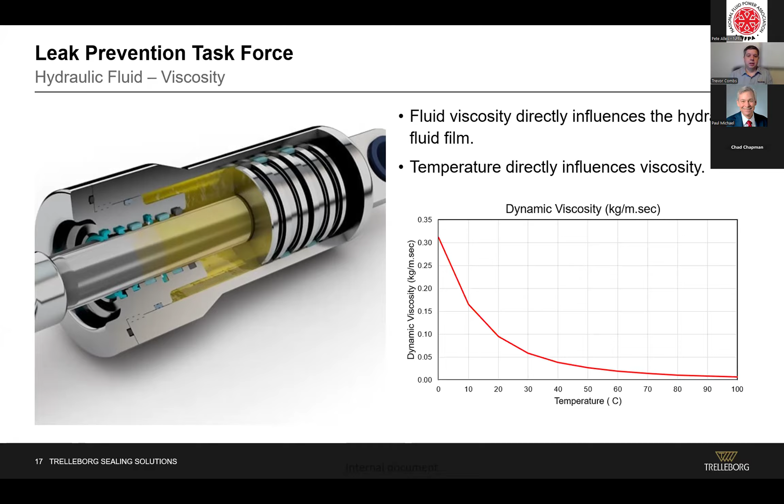It's important to note that contamination can come from internal sources as well. We see that quite a bit where there's component wear in the system, creating particles that get embedded into the seals and can cause additional damage, either to the hardware or to the seals, or to the rod, creating scratches that can eventually become leak paths. So contamination is an important factor to keep in mind, and it's important to understand where it comes from so you can eliminate that source.

Now the last element we're talking about here—we covered counter surfaces and hydraulic fluid, and of course the seals themselves are very important. Two of the main parameters affecting sealing are the material of the seal and the geometry of the seal, which is what this figure is highlighting. This figure is in the white paper, and it's talking about the rod seal specifically.

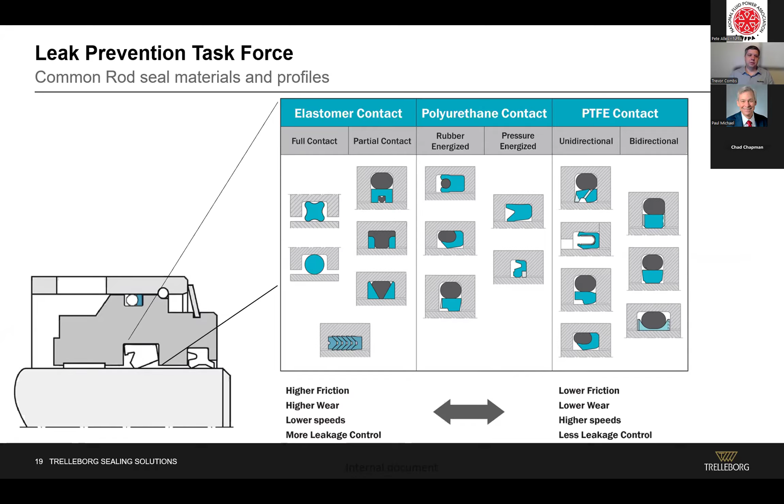I think that's why polyurethane contact is such an often selected, preferred material—it gives you that balance of good leakage control, but also good wear resistance, good friction, and can handle higher speeds without too high friction. So that gives you an idea of the different geometries and contact types when it comes to seal materials.

Okay, so now we're going to try and pull all this together. We're looking at the counter surface, the fluid, and the seals, and here's a diagram of how they interact with each other. This is a diagram of a static seal, where the fluid pressure is going to exert a force on the seal and the mating surface.

At the same time, the seal is exerting contact stress on the fluid, producing a shear stress that's going to cut that fluid film down to zero. That's the design intent of the seal—to cut that fluid film down to zero so you don't have any leakage. That's the goal.

It gets a little trickier and more complicated when you talk about dynamic seals, though. You actually want a fluid film under the seal, the entire length of the seal. You don't want to cut that fluid film to zero, because then your friction and wear are going to go up significantly. At the top here, it's showing the fluid film out on the outstroke.

If the fluid film thickness on the outstroke is greater than on the instroke, we're going to see leakage. If it's less than on the instroke, then we're going to have high friction and wear. So it really is an optimization, trying to balance the different parameters and requirements for a system—leakage, friction, and wear.

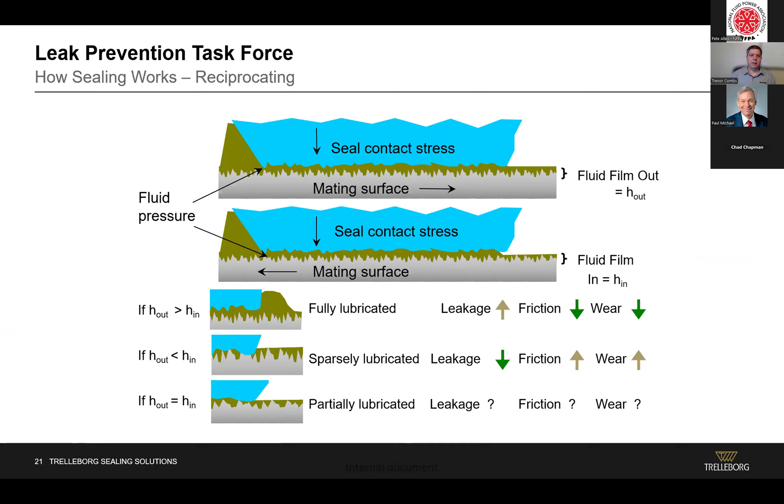That leads to looking at a sealing system overall. Often we tend to think about the different elements—rod seals, piston seals, rod wipers—but really what I wanted to convey in this webinar is that it's important to look at the full hydraulic system: the counter surface, the fluid, and how the different seals work together. That system can really be optimized depending on what the careabouts and needs are in the system, with the ultimate goal of increasing uptime and preventing leakage.

So if you dive into what that means, we've seen a few cross sections of sealing systems already. This is one with a tandem seal arrangement, and this is just an example of how the different seals might interact with each other.

So you have a primary seal here, which is going to have low friction, but it's also there to kind of act as a buffer seal to catch most of the pressure. It's going to let some of the fluid pass to the secondary seal, but it's going to buffer that pressure. And then the secondary seal is there to really cut that fluid film pretty much to zero. It might let a little bit by for the scraper to ensure that it has fluid film underneath it to reduce that friction and wear.

But these elements are working together, and the guide rings, or wear rings, are there to support the seals, and that's critical. As we'll see later, if you don't have the right support, that can lead to metal-to-metal contact and particles and contamination in the system.

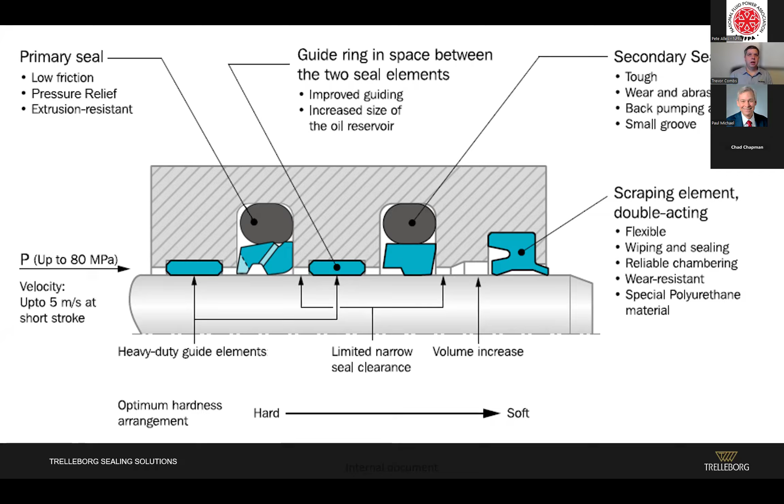So what I'm going to do next is talk about 3 different examples of design features in the sealing system that can be really helpful to preventing leakage.

So the first one, on the buffer seal, is that it can be really helpful to have a buffer seal design that can relieve back pressure. So this is the primary seal or buffer seal. Those terms are used interchangeably.

But having a relief mechanism that can activate when the pressure is trapped between the seals is important. Sometimes that pressure in between the seals will actually build up over time. With each cycle, with each stroke, there's going to be potentially pressure building up between those seals. And if that pressure increases to the point that it's above the system pressure, you need a way for that pressure to relieve itself back into the system. So that's what this seal is showing. When the pressure gets to a certain point where the pressure on the right is greater than the pressure on the left, that pressure will relieve back to the system. And so that's an important design that can prevent extrusion of the secondary seal.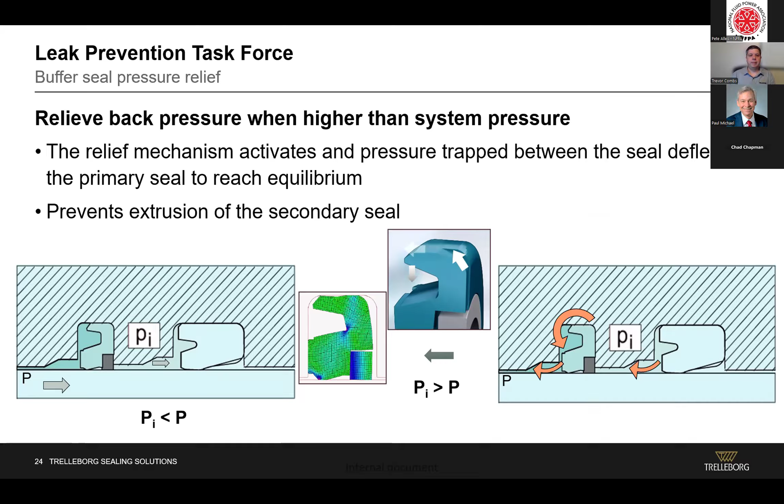The next key feature that can be really helpful on a sealing system, and seals specifically, is back pumping technology. In back pumping technology, on the forward stroke, the oil lubricating film is distributed under the seal as it goes out of the system. And then on the return stroke, that oil, you want to be pumped back into the system so that you don't have that leakage that we're talking about. And that can extend the seal life by reducing the dynamic friction and the breakaway force, the stick slip, like I said.

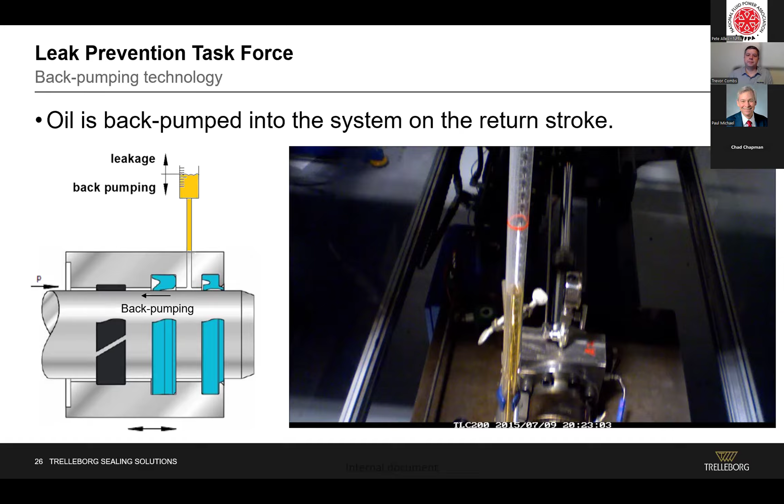Okay, so moving on to the last design element that I wanted to talk about. There's lots that we could go into, but I'm just going to highlight three.

This is if you have pressure buildup between that secondary seal and the wiper. If you have pressure buildup between those two seals, you can actually push the wiper out of the groove. And we've seen that quite a bit, actually.

So it's important to have the back pumping feature that can help relieve that pressure buildup, but also you can have a venting feature within the scraper that can help relieve any pressure if it builds up between those two seals, so you don't get the wiper pushed out of the groove, because that will lead to extensive external leakage typically.

What this design functionality does is, as the pressure hits the wiper and starts to build up, instead of getting to the point where it pushes the wiper out of the groove, it actually has a valve integrated into the wiper that will relieve some of that pressure. So you will get a little bit of fluid relieved out into the environment, which isn't ideal, but it's much better than having the wiper getting pushed completely out of the groove, and then you have a huge leakage problem.

I think wipers are especially sensitive to being pushed out of the groove, because as you can see in this picture too, especially, there's a little bit larger clearance there. So with less support for the wiper, instead of extruding, it would actually potentially get pushed out of the groove, which can lead to a lot of leakage.

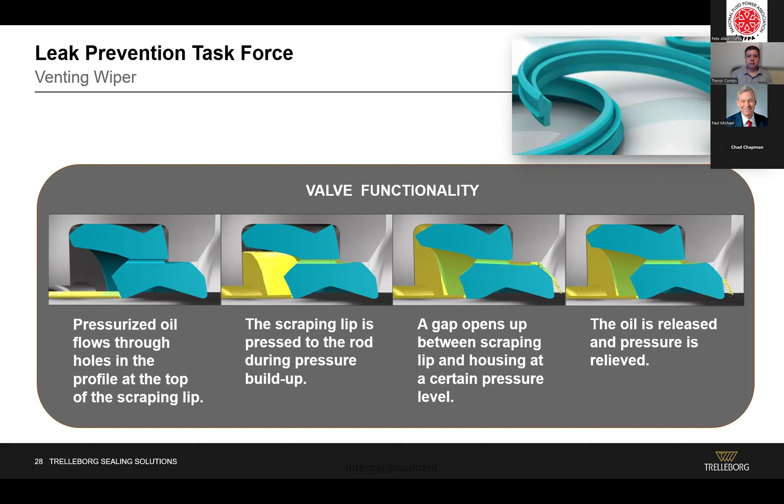Okay, so lastly, we're going to look at how all these elements work together within a sealing system by looking at a few examples of different sealing systems.

Here's another example, a little bit higher pressure, maybe a more medium to high heavy duty application where you have a primary seal that's taking a lot of that pressure. You can see all these seals are pressure energized with that U-cup sort of shape to it. So this is a common example for a system that can handle a little bit higher pressure, but still all polyurethane seals.

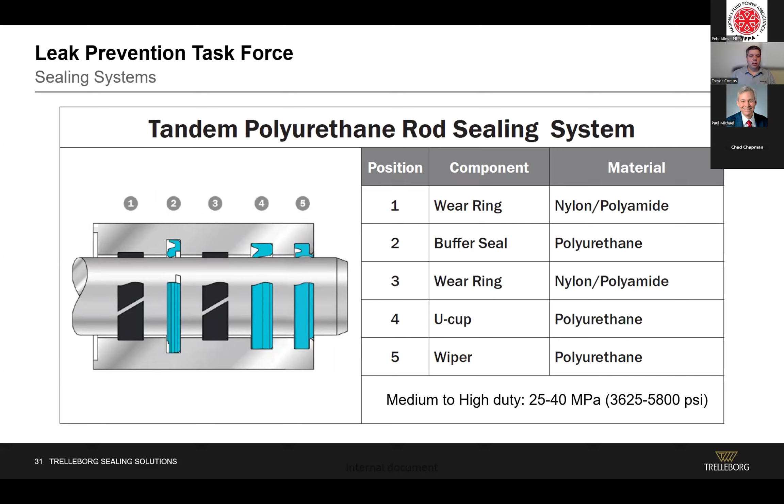Now, if you want to go into a little more of a premium solution, or for unique applications - if it's medium to heavy duty, but also high speeds, for example - you might use a PTFE solution. These can be really effective, low friction, low wear type seals that can be used for really high speeds. So that can be a good option.

In this system, it's combined with a polyurethane secondary seal to still provide good leakage control, and those can really balance each other quite well. So we've seen a lot of success with this type of system as well.

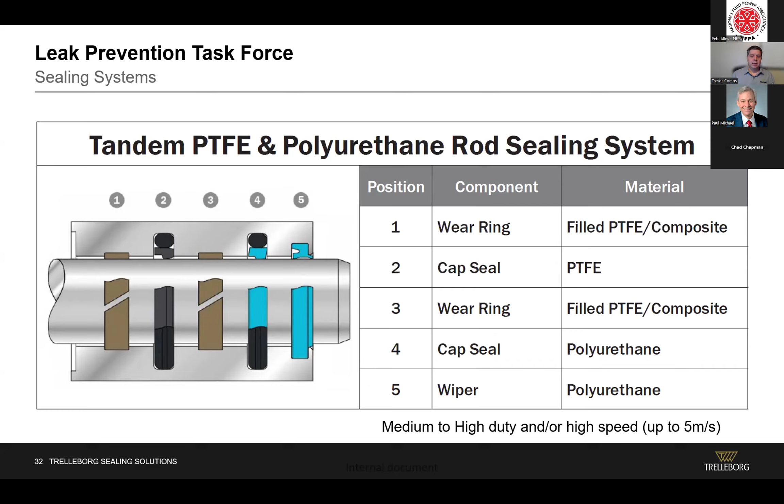Because if the speed out is significantly greater than the speed in, then there's more likely to be leakage. But if the speed out is much greater than the speed in, that's also going to lead you to higher friction, because that lubricating film isn't going to be under the seal as much.

So yeah, based on the pressures, the speeds, and the lifetime requirements, this system required a tandem sealing design that had both a primary and secondary seal with a double acting scraper.

All right, so for the last few minutes here, I was going to touch on some of the failure modes that come with seals. I'm not going to talk about all of these, but wanted to show a pretty extensive list. I'm going to focus on these four and just have a few slides showing different types of failure modes, and then we can talk a little bit about what to do regarding them.

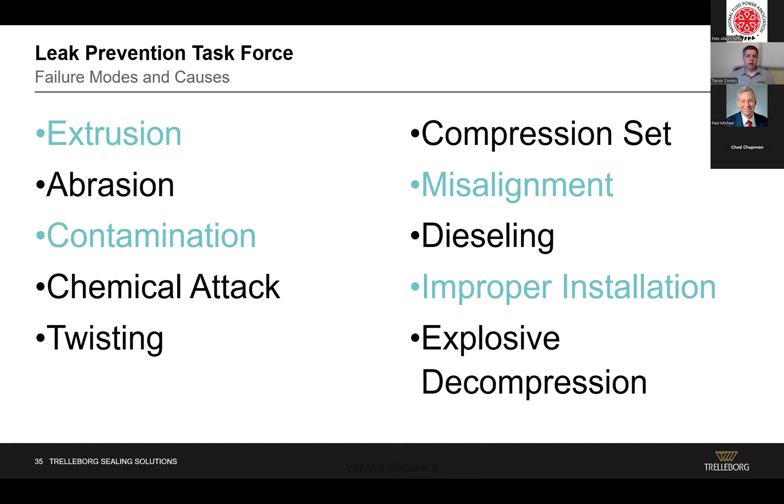So the first one is extrusion. I have some pictures of PTFE seals with acceptable extrusion on the left and not acceptable extrusion on the right. With PTFE seals and really high pressures, we can expect some extrusion or creep, as the material moves over time with pressure, heat, and wear. But if there's too much extrusion, that can cause the seal to start leaking and no longer perform as designed.

For rubber and polyurethane, they're going to look a little bit different. If you're operating the seals outside of their application limits, or if there's excessive clearances, too much pressure, too high temperature, they can start to extrude. Rubber seals will show little chunks torn off - it's called nibbling, where the pressure is forcing that rubber into the gap and it's getting torn off. Polyurethane seals will tend to shear, coming off in slivers or getting pinched or deformed. Those are all signs of extrusion.

So you want to look at addressing either the design, the pressure, the clearances - misalignment could potentially be another cause.

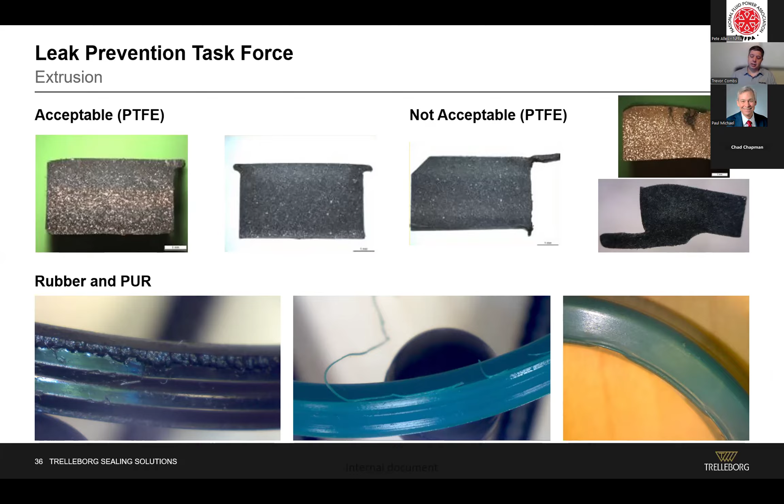Filtration is also key for that. And then misalignment - if you have too much misalignment, you can have metal-to-metal contact, and that's obviously going to create metallic particles in the system that can cause damage to the seals. But misalignment can also cause uneven wear on the seals, where on one side you might have heavy wear and on the other side you may not even have contact with the seal. So it's important to make sure the seal is aligned, and having good wear rings and good bearings in the system can help ensure alignment so you don't get metal-to-metal contact or uneven wear on the seals.

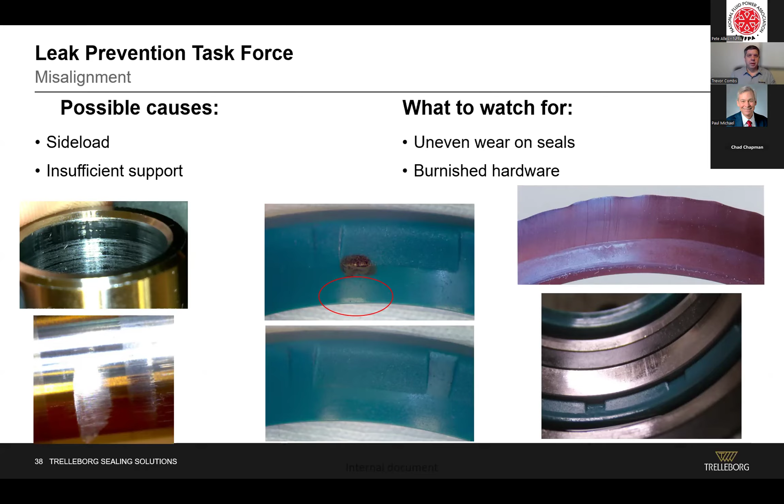Here's an example of misalignment on a PTFE seal, where in some of these pictures you can see the sealing edge, and in others it's worn away. So you'll have heavy wear on one side and possibly no contact on the other.

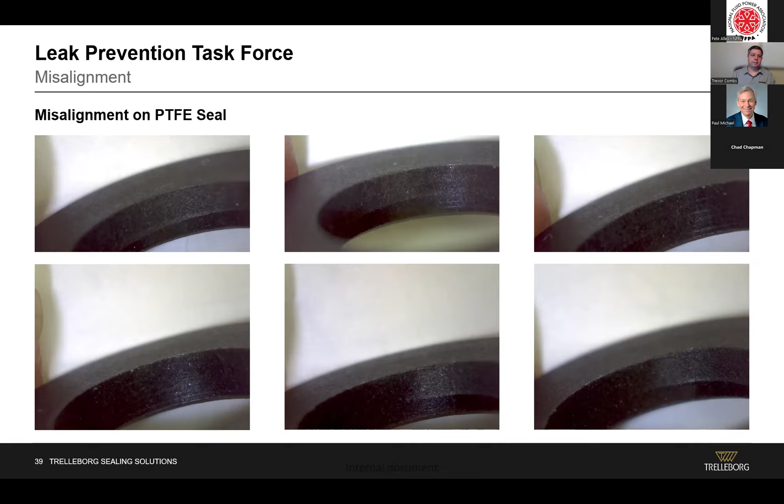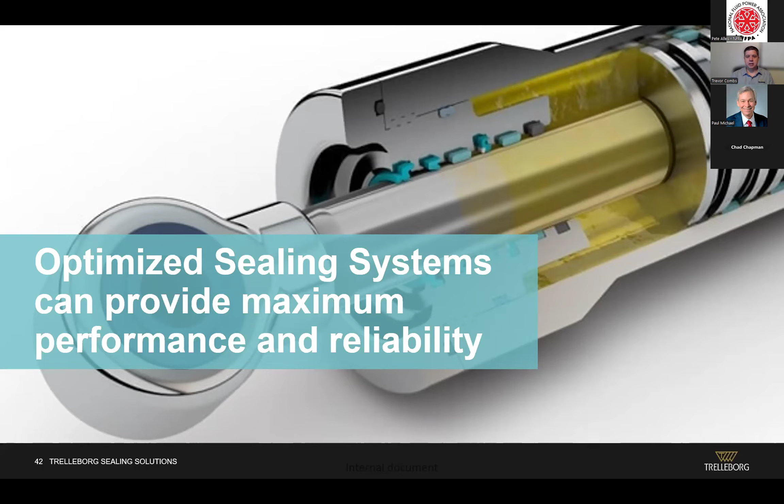So in conclusion, the goal is to optimize the sealing system to maximize performance and reliability. As we saw, these systems can get quite complicated with all the different elements working together and affecting each other. So we'd really encourage everyone to reach out to sealing experts to help design your sealing systems. Bring us in early so we can help ensure we get the right seals in there, the right space to meet the application needs, and really get the best solution for the application. Appreciate everyone's time and attention, and I'll pause here to see if there are any questions.

Yeah, Trevor, we have a series of questions, and I'll ask this one that just came in first because it relates to that last concept you were talking about: how can you tell which one is backward? I think it was on that last slide. Mm, yeah, okay, good question.